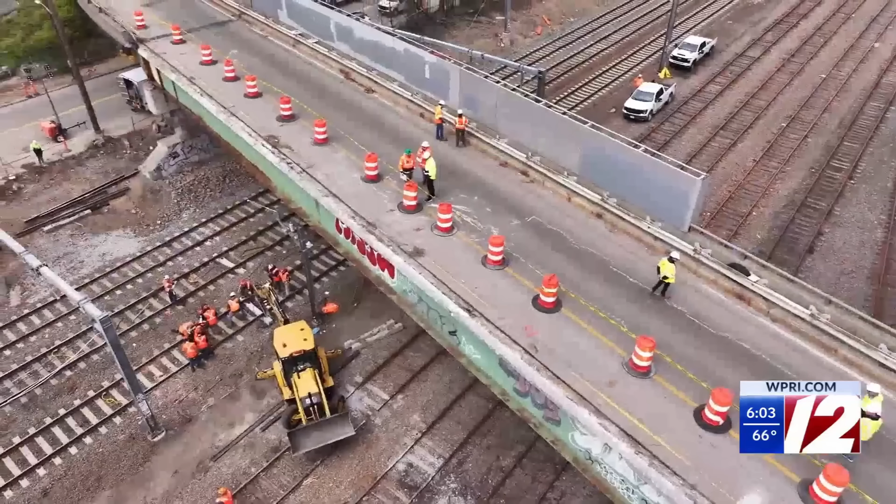So if you go back to this drawing detail, what I surmise from looking at the post-collapse photos, there appeared to be a very smooth surface left behind after this parapet wall fell over the side of the bridge onto the Amtrak lines. And you could see how this would have been constructed. This bar would have first been cast in with the bridge deck, and then the parapet wall would have been formed up with the reinforcing steel installed, and then the concrete placed inside those forms. So the parapet wall was constructed after the bridge deck was constructed.

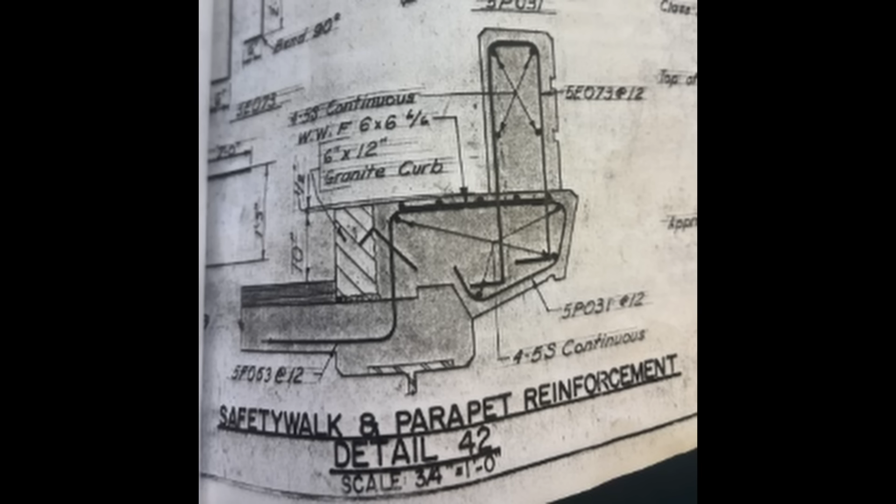Anyone out there during construction would have observed a bar sticking out of the previously placed bridge deck that was tied in to the subsequently placed concrete for the parapet wall. So that represents a single connection between the parapet wall and the bridge deck. Again, going through these photos, you see a very smooth post-wall failure contact that's left behind.

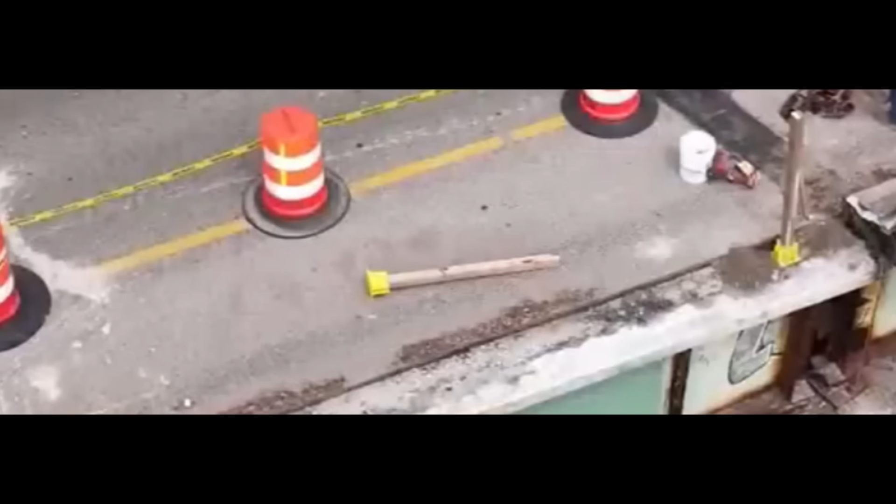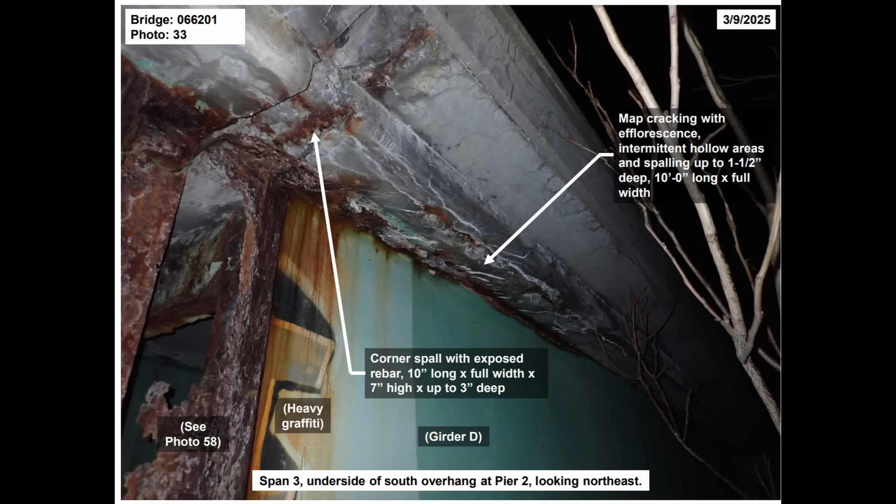This arrow points to just above the portion of the wall where part of it is overhanging the bridge and the other part is supported by the bridge deck. So a big section of this wall is what you would call cantilevered over the side of the bridge deck. And this cantilever portion from this 2025 photo indicates extensive corrosion.

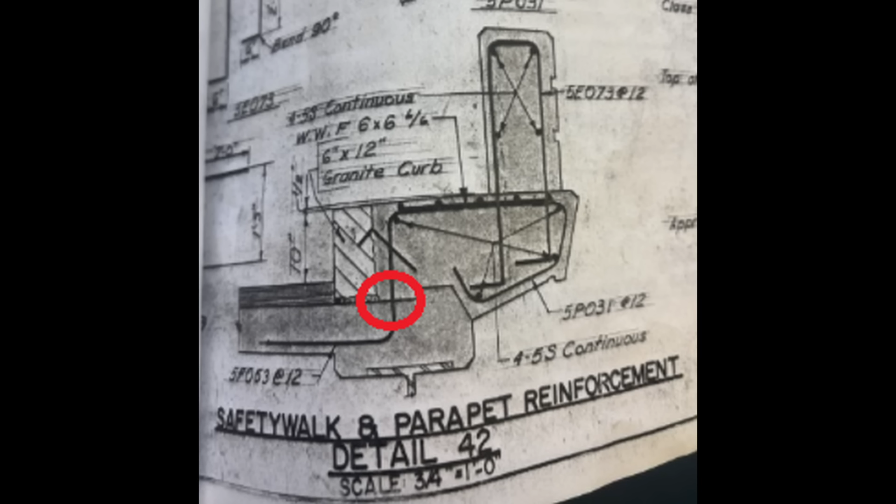So going back to this detail, we see just by looking at it that a little less than half of the wall section is supported directly by the bridge deck, and a little more than half of the wall is overhanging the bridge. The end result would be that if this single location of reinforcing steel every 12 inches along the length of the wall had corroded apart, there would be a tendency for the wall to turn over and fall over the side of the bridge.

So a moment, as it's called in engineering, a net resultant overturning force that's acting on the bridge at all times, that's resisted in tension by the connection of this reinforcing steel from the parapet wall into the bridge deck.

And if that connection is eliminated through corrosion or impact or some other activity, some other force, this wall is going to tumble over the side of the bridge, which we know was the end result on April 24th, 2026.

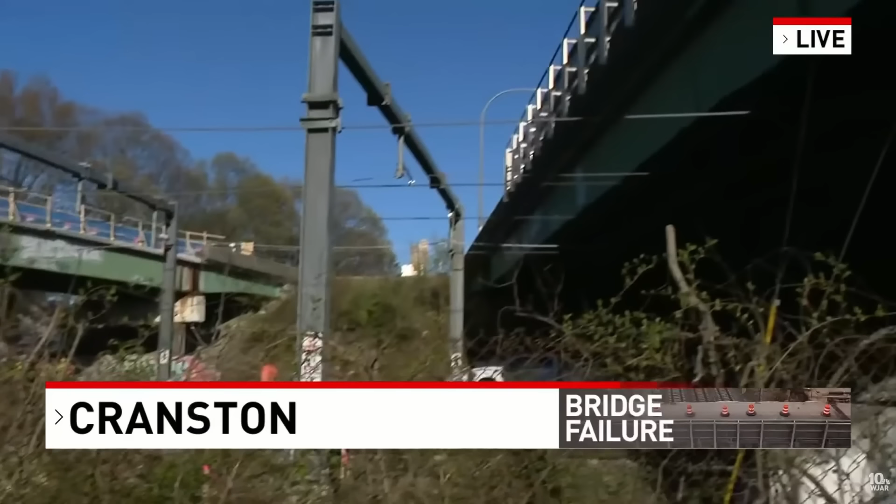Here's some news footage that shows the attachment of these Amtrak barrier walls, these electrical barrier walls that were installed in the late 1990s, early 2000s at the direction of Amtrak. And you can see that this barrier wall just simply bolts to the parapet wall. That detail that I showed you earlier from the 1960s was for the parapet wall as it existed from 1965 up until the time of the installation of these Amtrak barrier walls, again in the late 90s, early 2000s.

I'm going to play a couple of news stories for you, and they included some segments of interviews that I did. I conducted 2 interviews on Monday, the few days after this partial bridge collapse. One was with Kayla Fish with WPRI. The other was with Molly Levine from WJAR. So let's play these real quick.

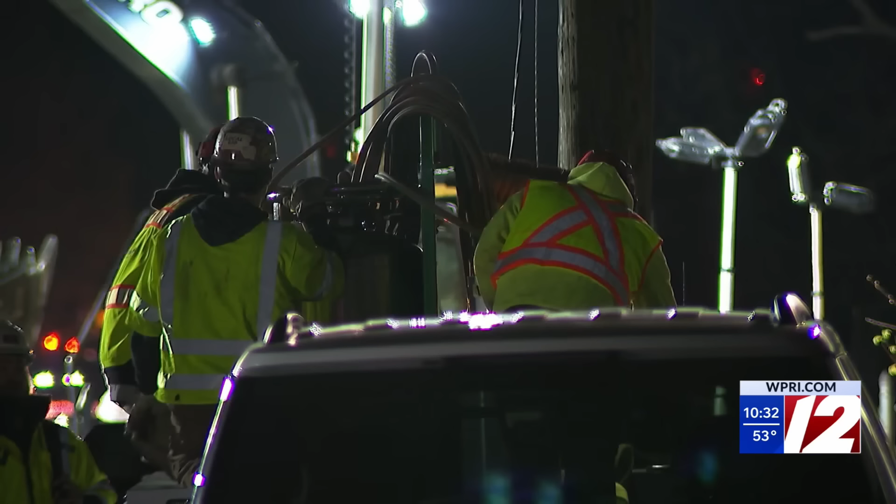Casey Jones is a Kansas engineer who examines infrastructure issues across the country on his popular YouTube channel. But Jones, who has been critical of RIDOT over the Washington Bridge crisis, says engineers should have a working theory as to what happened. I think it's fair to say that, hey, this is the initial indication we have. It's not final, it's preliminary, but this is what we think. But to not have or not present what the early thinking is, I don't think is acceptable.

As we sit here today on May 1st, 2026, the time of recording here, RIDOT officials still have not stated what they suspect happened with this wall collapse. And clearly they must have an idea of what happened. I have no doubt that they know exactly what happened, as a matter of fact, because they are going out immediately and throughout this week have installed additional reinforcement to the other 7 Amtrak barrier walls that are installed on RIDOT bridges.

But I think the concern extends far beyond just these 7 or 8 bridges with these Amtrak barriers. And I'm going to explain that here a little bit later in the video. Let's play this next segment from WJAR.

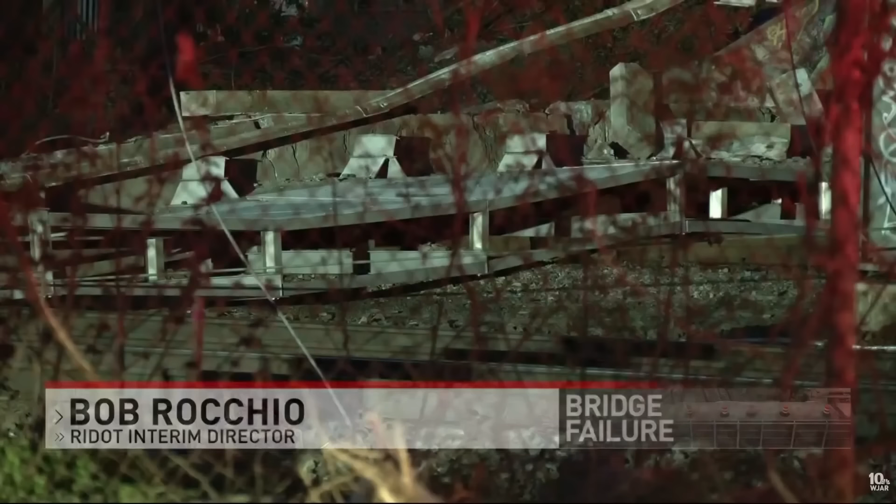Known critic of RIDOT following the Washington Bridge fiasco, Casey Jones challenges transportation leaders. The way it broke off looked like a very clean break, suggesting basically a plane there of separation between the bottom of the parapet wall and the bridge deck.

Let's go back and look at some of these Google Street View photos. This is going north on this ramp. Obviously, this is prior to the wall collapse. And the wall that collapses is on the south side of the bridge, so to the left of these photos.

And we can see a problem right away, that the routine inspections wouldn't have access to the location of the attachment of that single reinforcing bar. I say single, there's one every 12 inches along the length of this bridge along the wall. Those bars are not visible for inspection unless there was some destructive testing done during the bridge inspections. And there's no evidence that such destructive testing was done. So you have no idea what's going on with that reinforcing steel inside the parapet wall connecting to the bridge deck.

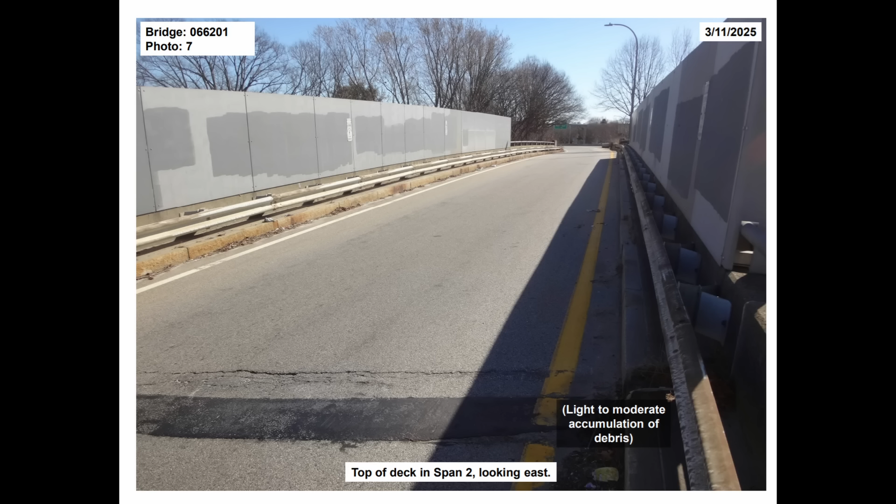Another thing we notice from this photo is there's no drainage on the bridge deck. So snow, ice, salt during the winter is all going to accumulate and stay ponded right up against the base of this parapet wall. And so we've already seen from that construction detail, there's a cold joint there. There's no way to really waterproof that connection.

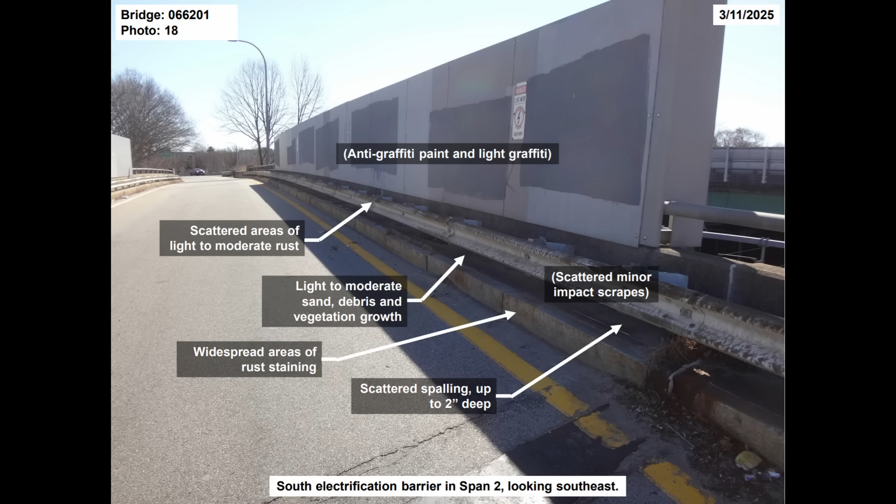So it's not at all surprising or implausible that water would seep below the contact of the parapet wall right on top of the bridge deck and just sit there and corrode that single reinforcing bar, single, but one every 12 inches along the length of the wall, over decades. From the previous inspection photos, we also see evidence of numerous collisions with cars and trucks up against the guardrail and the parapet wall. Let's play some of these prior statements from acting RIDOT Director Bob Rocchio.

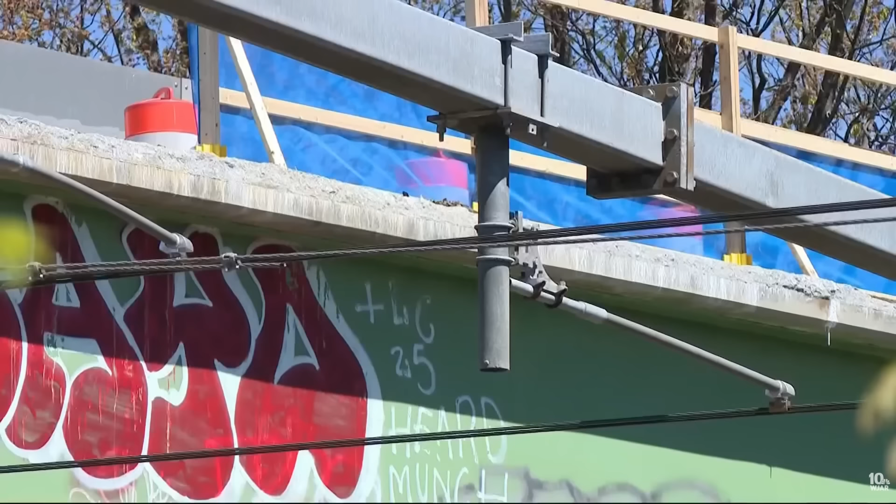Why do you believe that it was the Amtrak barrier that came down and brought this concrete with it and not the other way around? Just from my engineering knowledge, I know that those electrification barriers are much wider in the wind load that is placed on that. The area of that shield, to take the wind load, is much larger than on our parapet. TF Green recorded Friday night's wind at under 10 miles per hour.

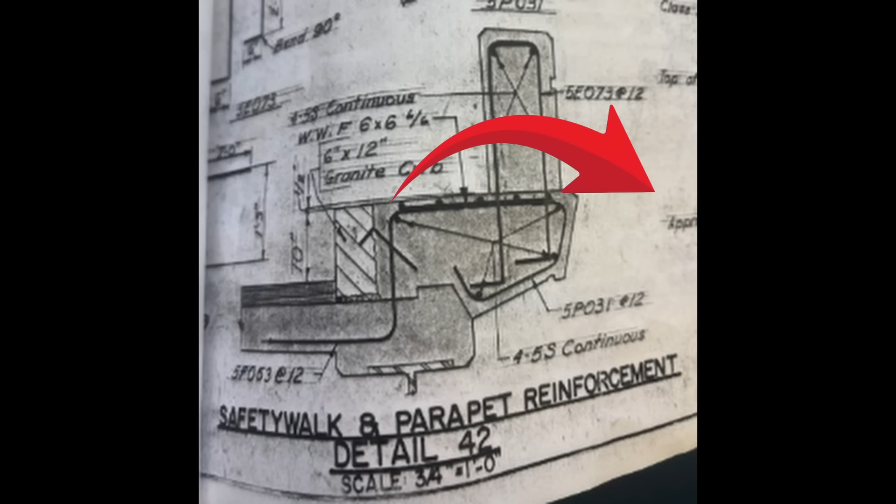Again, we have RIDOT making statements that appear to be wholly unsupported by the available information. I disagree with Mr. Rocchio's statement that it was the Amtrak barrier that caused the collapse. It's clear to me, looking at that wall section, that if the reinforcing bars corrode away, there's going to be a net force, a resultant force, that's going to tend to overturn the parapet wall from the bridge deck to over the side without having these additional loads on it.

Now, could these loads over time, wind loading on the Amtrak barrier, vehicle impacts, that sort of thing, cyclic loading with traffic going over it decade after decade, could that have contributed to deterioration and degradation of that reinforcing connection? Undoubtedly. But again, I think if you break enough of those reinforcing bars, the configuration of that wall is such that it's going to go over the side of the bridge, and it's just going to take the Amtrak barrier wall with it. It's not a situation, in my view, where the Amtrak wall initiated the failure.

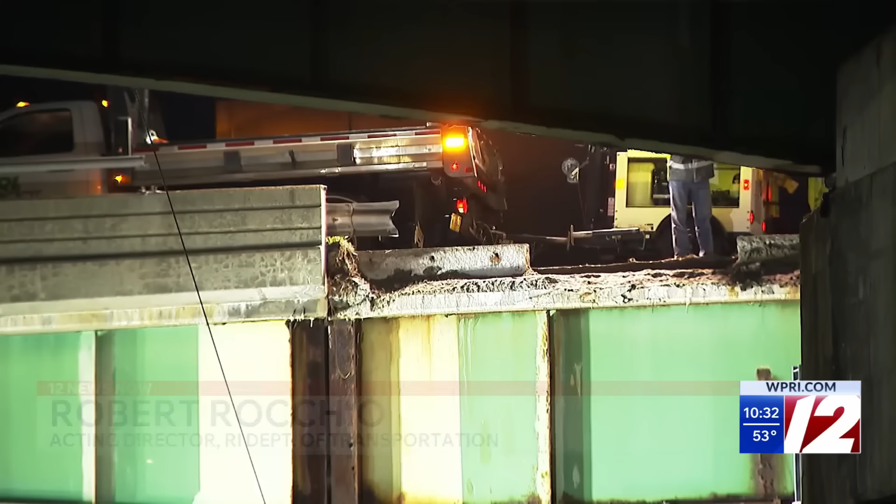And I like what was pointed out there. That was Molly Levine's segment, that records indicate on Friday, April 25th, when this wall collapse occurred, the area had just experienced very light winds, less than 10 miles an hour. And at one of the earlier press conferences this week, Acting Director Rocchio indicated that there was no construction activity that could have or would have initiated this wall failure. There's no indications that any work happened on or adjacent to that bridge that would have caused this. RIDOT is working to determine the cause. We do not want to speculate.

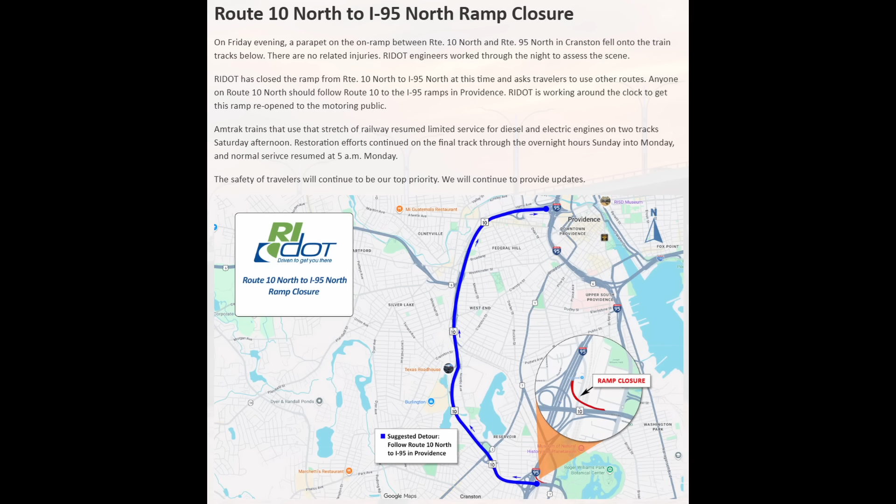Doesn't require speculation. It requires good engineering judgment to tell the public after your initial assessment what you think happened so that you can implement corrective actions as necessary to retrofit the other bridges. And again, we're talking a week later here and it hasn't happened. RIDOT has a ramp closure website. There's a link in the description, and they continue to post additional inspection reports and inspection photos to their website. As I pointed out in a previous video, I wish they would post this wall detail. I also think they should post the detail for the fix or the remediation work that they're doing for similar walls in this location or in their system, and they haven't done that.

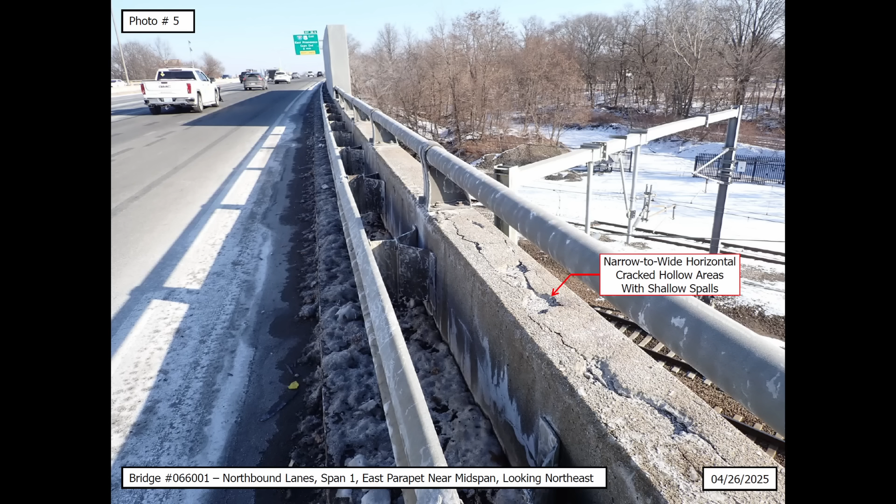One of these additional inspection reports shows, this is Bridge 066001. I just did a cursory look at these additional reports, and 5 pages in to the photos for this inspection report, you could see significant deterioration and degradation of this parapet wall. And you see the Amtrak electrical barrier farther down the road here, but look at the snow, ice, and salt that's accumulated up against the parapet wall. And as a number of you pointed out in the comments to my previous video, you strongly suspect a corrosion issue associated with this parapet wall collapse, this partial bridge collapse, and I agree.

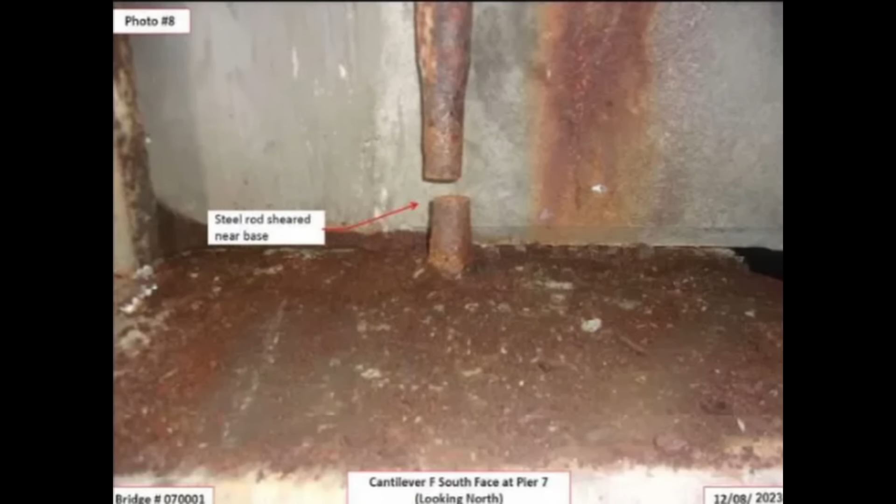And to the extent that this was a known vulnerability, I think RIDOT's got their hands full, because from what I understand, this type of parapet wall was more or less a standard wall design in the late 50s and early to mid 1960s. So how many of these bridges does RIDOT have? Whether or not there's an Amtrak barrier attached to it, I think it's still vulnerable to this type of failure due to corrosion. And we know RIDOT has extensive problems with corrosion for bridges throughout the state. I mean, that's what led to the underlying problems with the Washington Bridge and its closure and efforts to replace it that are ongoing as we speak.

So again, I want to thank that anonymous source that sent me that drawing detail. RIDOT, please confirm whether or not that detail represents the wall installation that was done here at this ramp where the wall eventually failed last Friday. Provide the detail for what you're doing to retrofit these other bridges. I've got several pending APRA requests. RIDOT's been slow to fulfill them, but I'll continue to follow up on those requests.